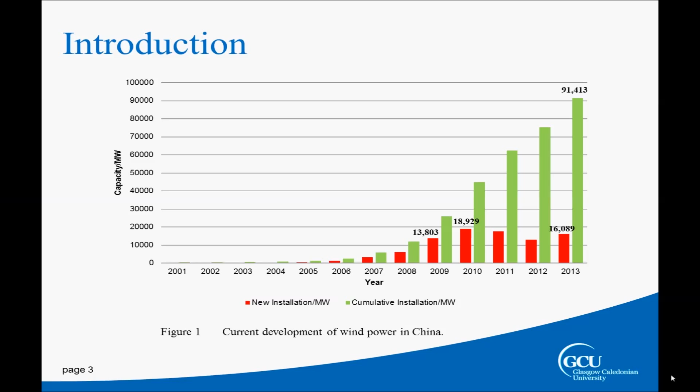There is an overview of why I would like to do this research. With wind capacity growth, the capacity of individual wind turbines also increased, and the size of the wind turbine generator is also scaling up. There are a lot of surveys on the failures of wind turbines; however, they focus on a variety of wind turbine generators, such as different types of wind turbines and different rated power of the wind turbines.

At the same time, the start date of the failure data spans a very long time - I mean the focused failures may be over 10 years, but the early failures in newly built wind farms were neglected. In China, there are a lot of newly built wind farms with many documents recording operation and maintenance, and a lot of data related to failures, but they didn't manage or analyze it. So that's why I will focus on the early failures in new wind farms in China.

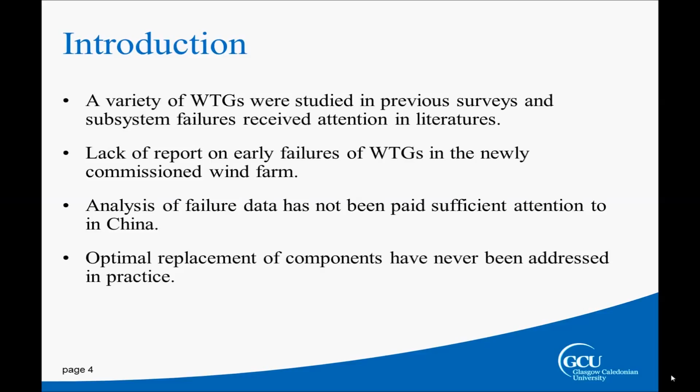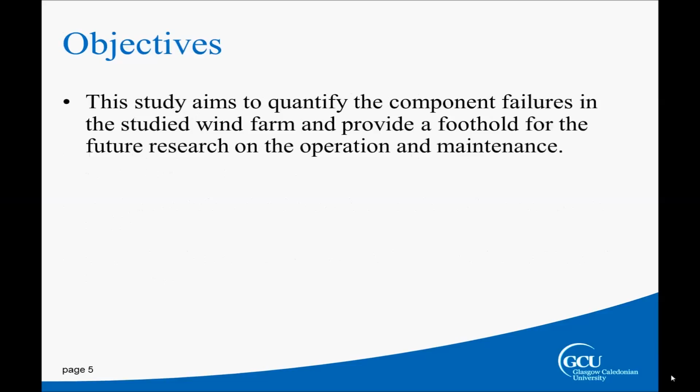This study aims to quantify and identify the component failures in the studied wind farm, and provide a foothold for future research on operation and maintenance in wind farms. I would like to divide the wind farm into several subsystems, for example, the pitch system, which controls the blade to obtain maximum wind power from the wind.

We would further divide the subsystem into components or equipment, to study the failures at the component level.

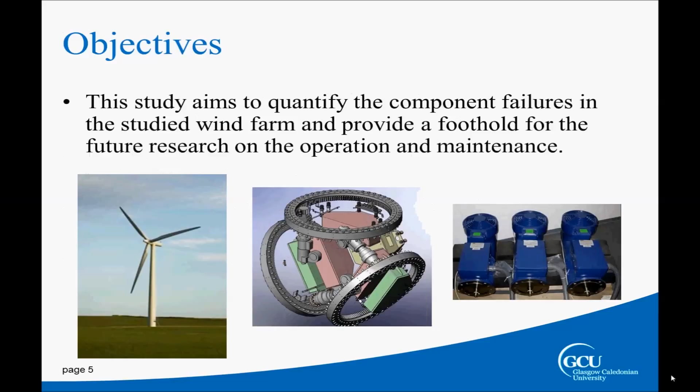We use a quantitative approach and a qualitative approach for statistical research in my work, using failure frequency ranking for the failures. We rank the failures based on failure frequency and downtime for each subsystem failure. We also use failure mode and effect analysis to identify the failure mode, failure effect, and failure cause for the different components. The failure mode is identified by the symptom through which the failure could be observed.

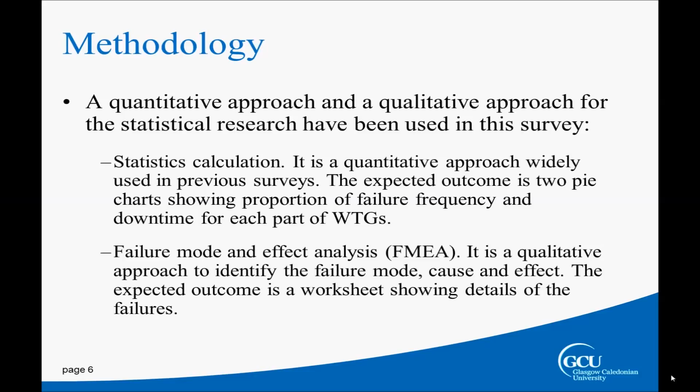There is an overview of the wind farm we surveyed. It's located in the southeast coastal region of China, with 134 wind turbines using double-fed induction generators, each with a capacity of 1.5 megawatts. All the wind turbine generators have been commissioned since the end of 2010.

We focused on 2011, and found there were 691 failure events in 2011, and those failure events caused outages of the wind turbine generators. Due to the failures, there was a loss of 4.23 terawatt hours, which equates to 1.3% of the wind farm's electricity generation during 2011. So I focused on that first operational year for the newly built wind farm in China.

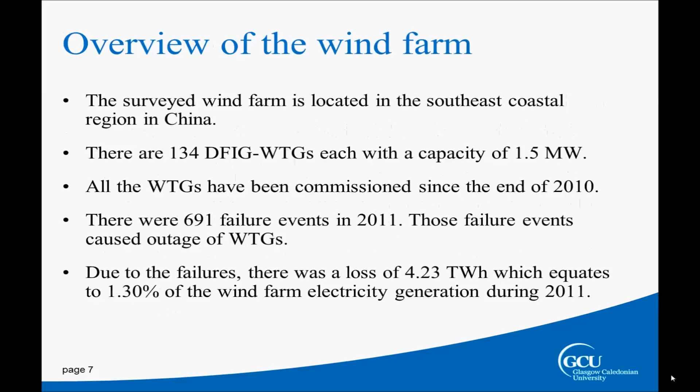Before showing the results of the failures, I would like to introduce my studied wind turbine generators.

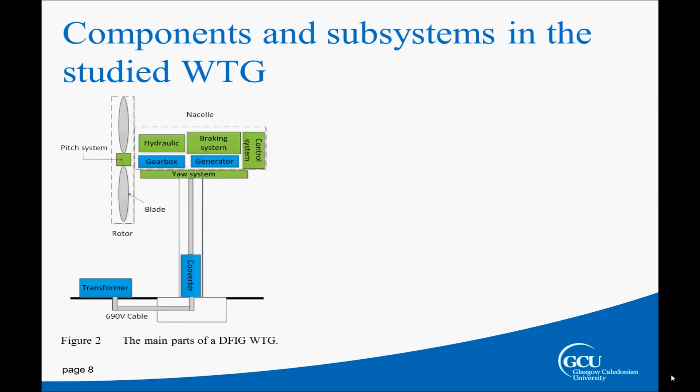Please see this picture. It is just to briefly introduce some parts in the wind turbine generator, and I divided the wind turbine generator into subsystems and some main components, just in my survey.

Different subsystems will have the same components, such as the bearings, so we will identify that they are different, for example, the gearbox bearings and the generator bearings.

The subsystems and components above in the subdivision are independent, and it's not easy for all components to be shown in this brief figure, so they just show some of the important ones.

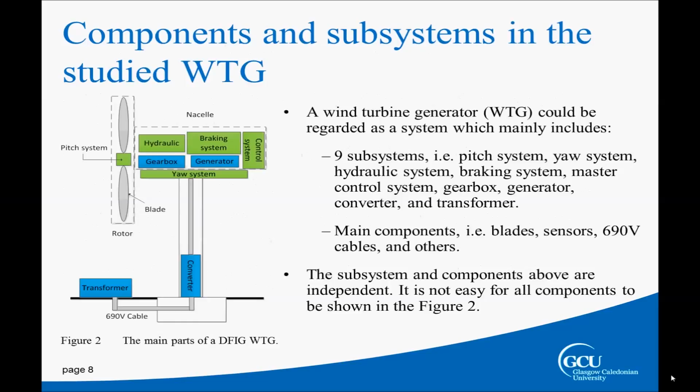I hope this video could help you understand the configuration of the standard wind turbine. You will see the pitch system in the hub, which could control the blade to rotate about the longitude of the blade, with a system of actuators to obtain the maximum wind power from the wind.

It transforms the mechanical power through the main shaft to the gearbox, and the gearbox increases the rotating speed and transforms the power to the generator, which produces electricity and sends it to the grid.

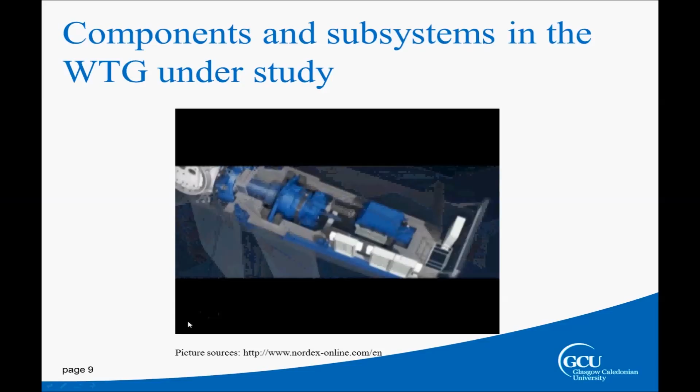So this is the brief configuration in the nacelle of the wind turbine generator. You will see there is a platform for the operator and personnel to do some maintenance and activities in the nacelle of the wind turbine.

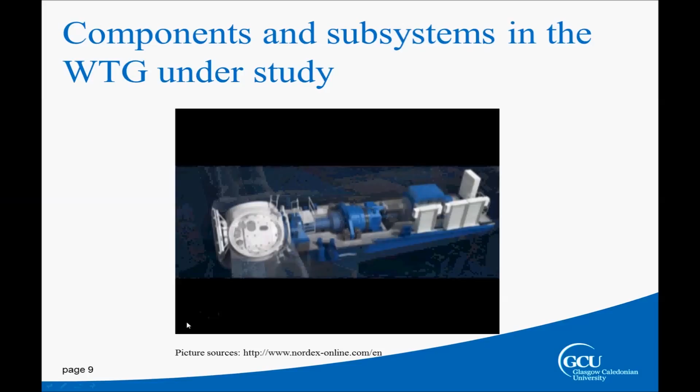Between the nacelle and the tower of the wind turbine there is a yaw system to help the nacelle face the direction of the wind, and from this way, personnel could access the hub, which is the location of the pitch system, to perform maintenance.

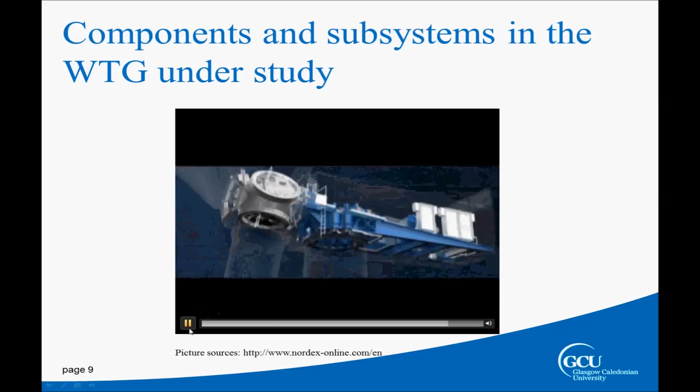So this is just the brief introduction of the wind turbine generator. Let's move on to the results of my survey.

Figure 3 shows the proportion of failure counts for each subsystem, and figure 4 shows the proportion of downtime per subsystem and component.

We will see that the pitch system accounts for the highest proportion of the total failure frequency, and also accounts for the highest amount of the total downtime.

I think it's because they have the dominant failure frequency, so that doesn't reveal that the pitch system has the longest failure time for each failure, but they have the highest amount of downtime in the total downtime.

We will see the generator, which was paid much attention to in the literature, and the gearbox, which is also regarded as an important part of the wind turbine generator, did not have too much failure frequency and downtime in this survey.

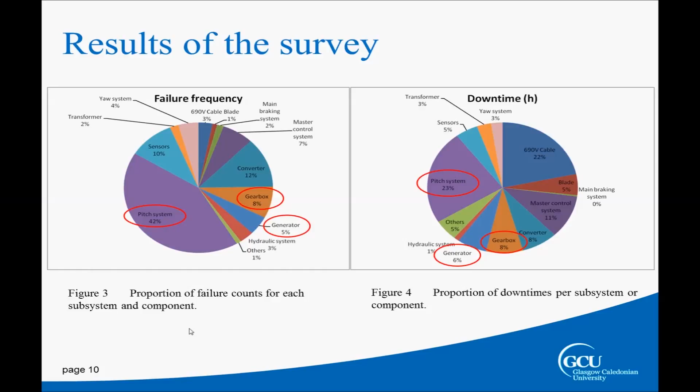Let's move on to the further study on the pitch system, and you will see these figures show some important components which have higher failure frequencies.

You will see the pitch controllers in the pitch system, which communicate with the main master control system in the wind turbine and send commands to the actuator in the pitch system, and it accounted for 36% of the total pitch system failures.

The slip rings are the electrical connection between the hub and the nacelle, and the encoders measure the position of the blade and the speed of the electric motor, and both account for 17% of the total pitch system failures.

The battery sets, which include the battery charger and some relevant circuits, supply the pitch system in emergency conditions, and it also accounts for 11% of the pitch system failures.

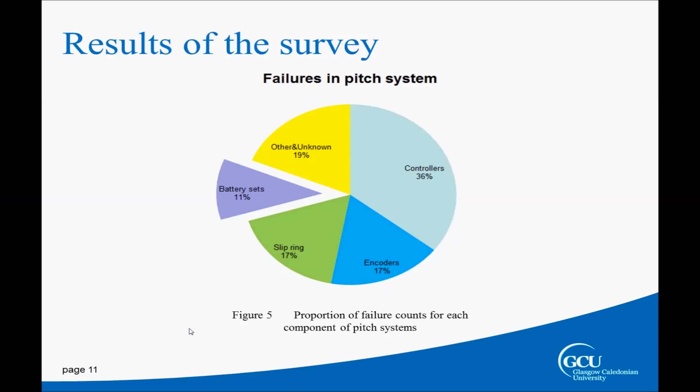There is further study on component failure with FMEA, and this is a sample of the FMEA worksheet. The first column identifies the component, the second has the function and failure mode, the effect shows what happens with this failure, the failure cause and failure detection tell us how we can observe this failure, and failure rate is just another form of the failure frequency.

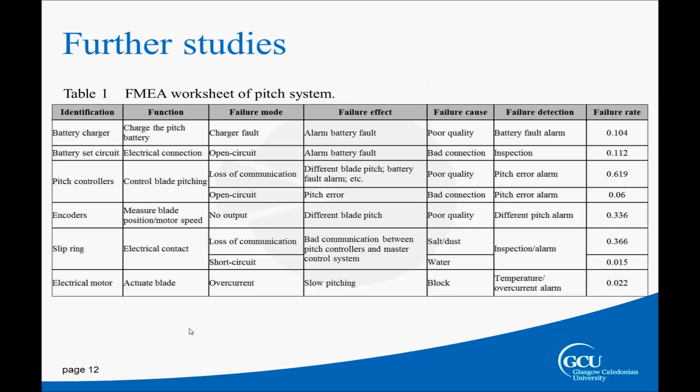We will find that the pitch controller has the highest failure rate, and loss of communication is the dominant failure mode. And this is for the pitch system.

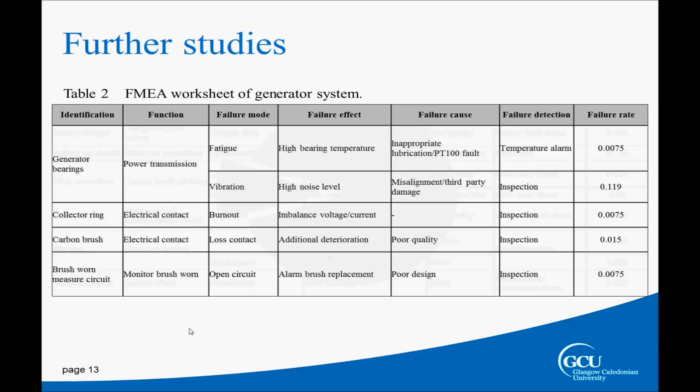We will see the vibration of the generator bearings have the highest failure rate. And this is for the gearbox. We will see that in the first year, operational year, the leakage is a critical failure in the gearbox operation and maintenance.

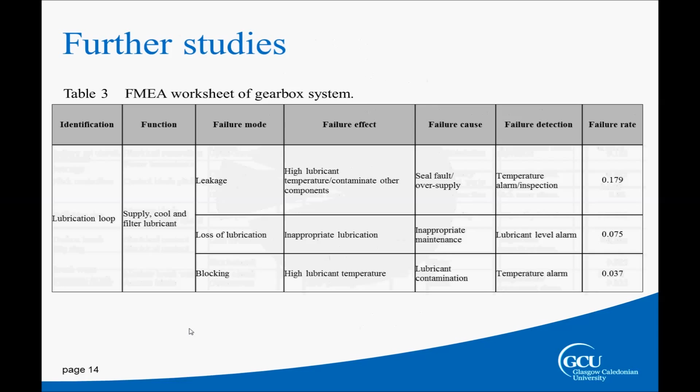Okay, let's conclude about the result. We will find the pitch system having the highest failure frequency and the highest downtime. It's one of the most critical parts of the wind turbine generator.

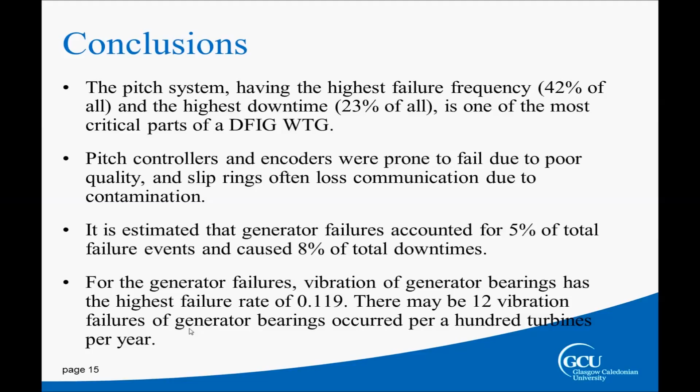It's estimated that generator failures account for 5% of total failure events, and the vibration of the generator bearings have the highest failure rate, and the gearbox accounts for 8% of total failure events. And the lubrication problem dominates the failures in the gearbox in the first year.

Okay, that's all my presentation. Thank you.

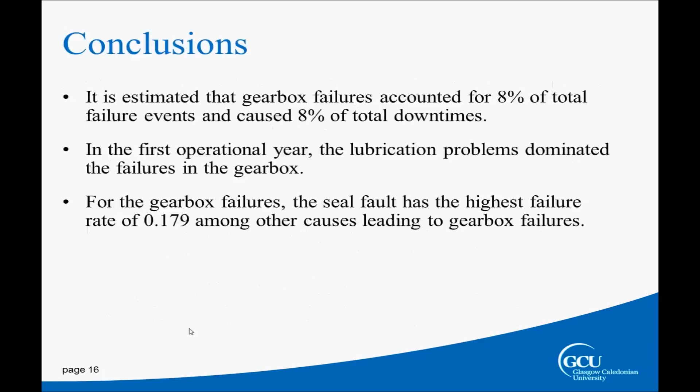Thank you for your presentation. So you've done the survey on failure for particular Chinese wind farms. So how will this work be used?

I would like to, this is just a preliminary study of my project. I would like to use this data to predict the failures in the future.